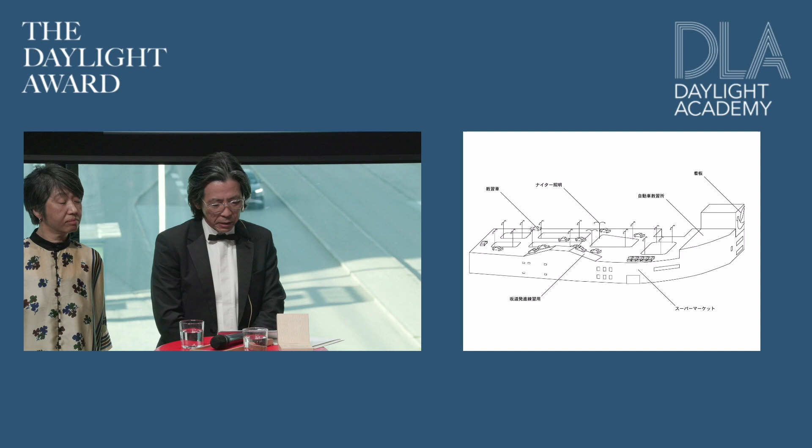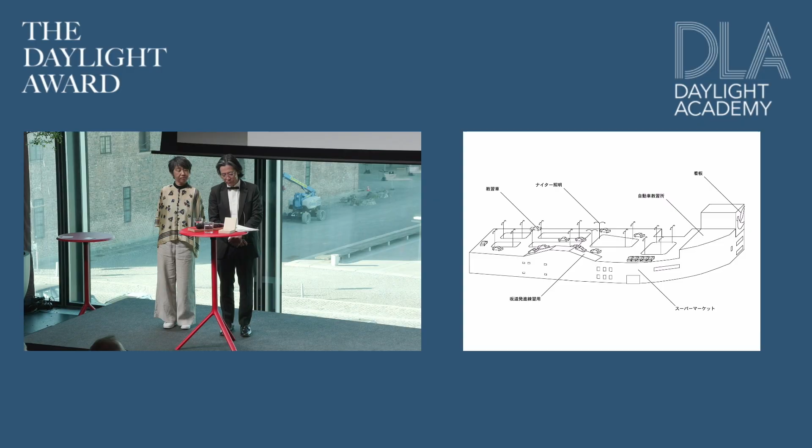In the late 1980s, when we were studying architecture, Tokyo was beginning to take on the appearance of an Asian metropolis, and was attracting global attention as an alternative to cities from the Western world. These urban conditions were not achieved by planning, but by the path dependency brought by World War II—rapid reconstruction with limited resources, followed by high economic growth in the 1960s and 70s, resulting in a random cityscape. If we would work as architects in Tokyo, we wanted to discover what made the city so fascinating and find a means to convey this to the world. That is where our urban research in Tokyo began.

Made in Tokyo is a field study that identified Tokyo's 'dame' (no good) architecture—hybrid structures which entangle the adjacent environment into an urban ecological setting. We call these environmental units, where the orthodox categories of urban artifacts such as architecture, civil engineering, park, and landscape design lose rigid boundaries. Dame architecture as a collective might express a common sense embedded within the Tokyo cityscape. Their diversity could not be fully captured by the architectural typology we had learned in school, and requested an alternative theoretical framework which grasped urban and architectural ecology.

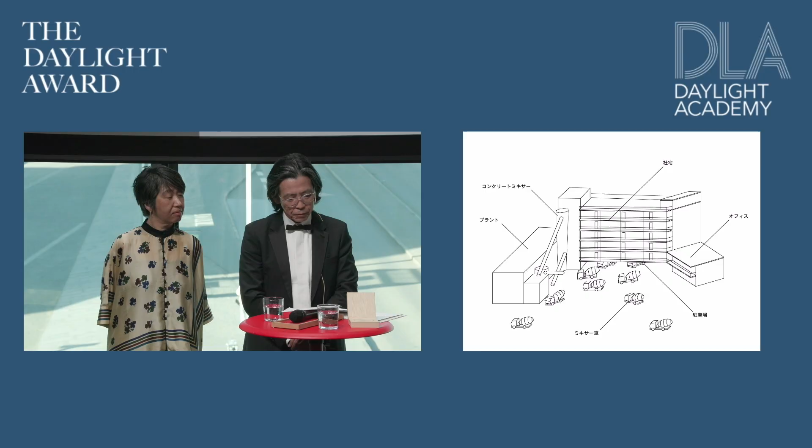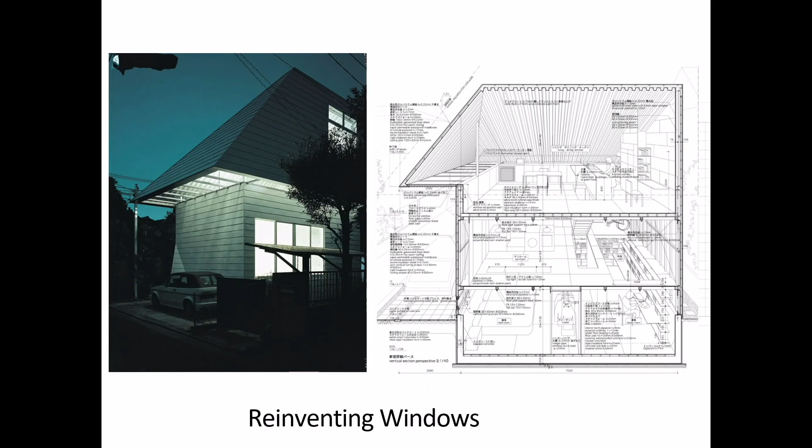Around that period, Gae House was designed in a densely populated residential area of Tokyo. It has a big roof above a small box, and the eaves are glazed to capture the light falling into the gap between neighboring buildings. The light from below, through horizontal windows, reflects onto a metal roof and fills the living room. It results in a unique behavior of diffuse light that could only be experienced within this house.

It was a reinvention of the window. The 4 Boxes Gallery on the campus of Krabbesholm Højskole contains 4 boxy galleries, half interlocked into one another from top to bottom, creating gap spaces to bring indirect light to the exhibition space.

Rue Rivière apartment block in Paris reinterprets the repetition of French windows and balconies in order to accommodate the diversity of livelihood behind the facade. Whilst this behavior of windows is shared across the Parisian streetscape, the random layout of balconies in varied sizes obscures the boundaries between households, creating a three-dimensional neighborhood on the facade.

Through those researches and design practices, we conceived the idea of architectural behaviorology, a framework that considers not only human behavior, but also the behavior of light, air, heat, vapor, and water, all governed by the laws of nature, as well as the behavior of buildings as types shared by a particular region or era. Although the principles of behavior—human habits, physical laws, and the cultural norms of buildings—are unchangeable, it is possible to define the behavioral capacity and the interrelationship between them. As behavior is repetitive, a distinct rhythm can also be recognized in the behaviorology.

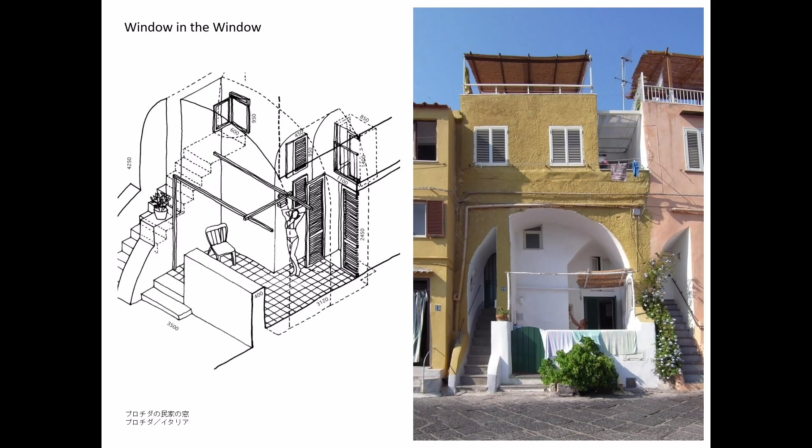This discovery, overlapping with ethnographic interests, developed into window behaviorology, a study of windows around the world. Tsukamoto Laboratory of the Institute of Science Tokyo has published a series of studies under the title Windowscape, Window Behaviorology, which extracts window concepts from the behaviors gathered at windows—the streetscape of windows, and the work of windows—which works together with craftsmen in manufacturing settings, and Nordic windows from the early 20th century, which might be a gift for tonight's participants.

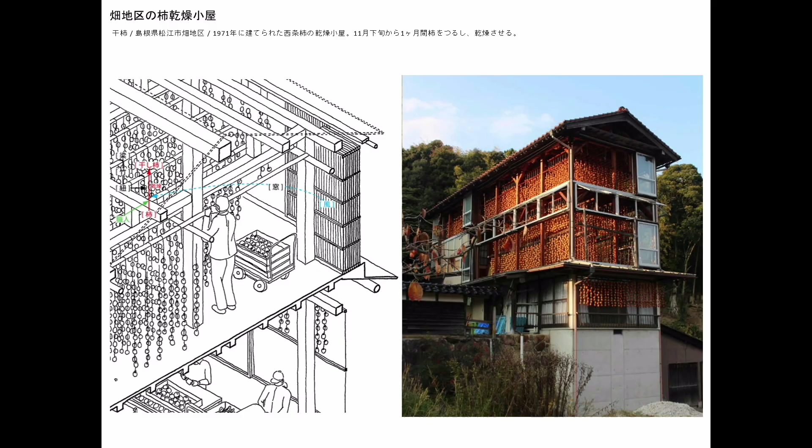Furthermore, the Chair of Architectural Behaviorology at ETH Zurich, led by Momoyo Kaijima, compiled Swiss Window Journey by exploring the actor network of windows across Switzerland.

Some projects treat daylight as a resource available in our own environment. The Environmental Energy Innovation Building of Institute of Science Tokyo, covered by a solar envelope consisting of 4,000 PV panels, reduces carbon emissions by 60% compared to average laboratory facilities.

Muginoko School is an alternative primary school for children who find it difficult to attend conventional school. It operates through a welfare organization that has provided seamless care for children with developmental disorders and their parents, from early childhood through to adulthood.

Rather than a school of square, discipline-oriented classrooms where everyone faces the same direction and listens to the teacher at the front, like this room, this is a school where octagonal classrooms—in which it feels natural to gather in the center of the room to read books or make things while chatting—are connected diagonally.